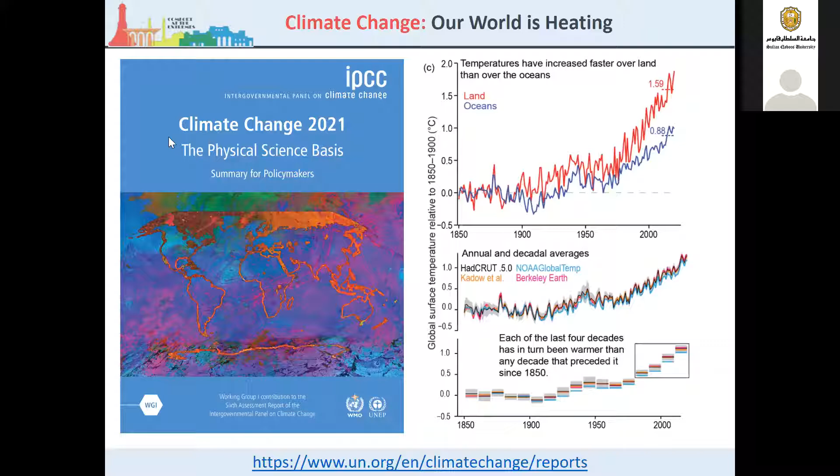The recent IPCC report shows that we have unequivocal heating of the world, and we all know this, and the evidence is overwhelming now. It's undeniable. But every ton of CO2 emissions adds to global warming. If you look now at where we are in terms of the temperature of the planet, we are getting on for about 1.5 degrees centigrade warmer than the 20th century average.

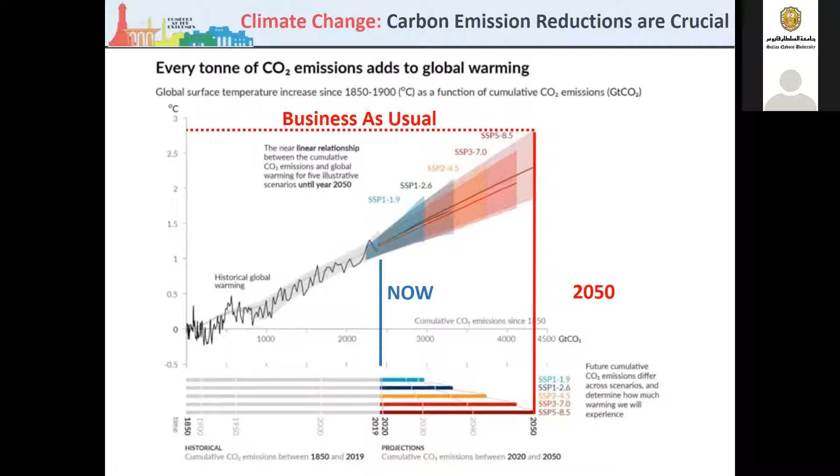But see how rapidly it's projected to rise in the future. By the time we get to 2050, a very short time away, it'll be up 2.5 to 3 degrees centigrade if we carry on with business as usual.

Communities, where you have non-functional communities, they become challenged. So we have to functionalize communities. We have to build resilient communities as well.

Infrastructure, we're getting systemic failures. We've seen this around the world, whether it's bridges washed out or grids collapsing. So we need to fortify infrastructures.

But the one that people often ignore is system capacity. Inequality in societies is magnified, meaning that as we have more people, they have less each. So we have to capacity plan and resource allocate, and that has to be systematized.

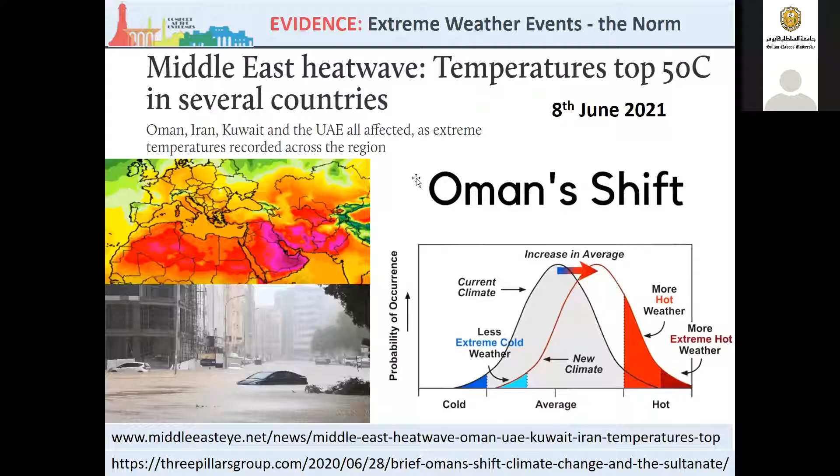As we heard in the opening, the Middle East is experiencing, like all other places of the world, these terrific extremes. In Oman last June, on the 8th of June, we had temperatures above 50 degrees centigrade, and it's predicted, there's a lot of good science predicting the types of temperature Oman will experience in the future. A couple of weeks ago, there was a terrific cyclone also mentioned, which had catastrophic effects on the infrastructure of the country.

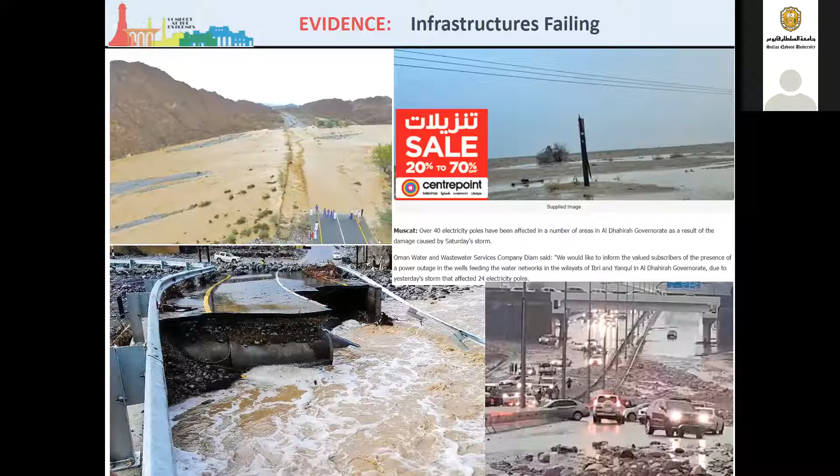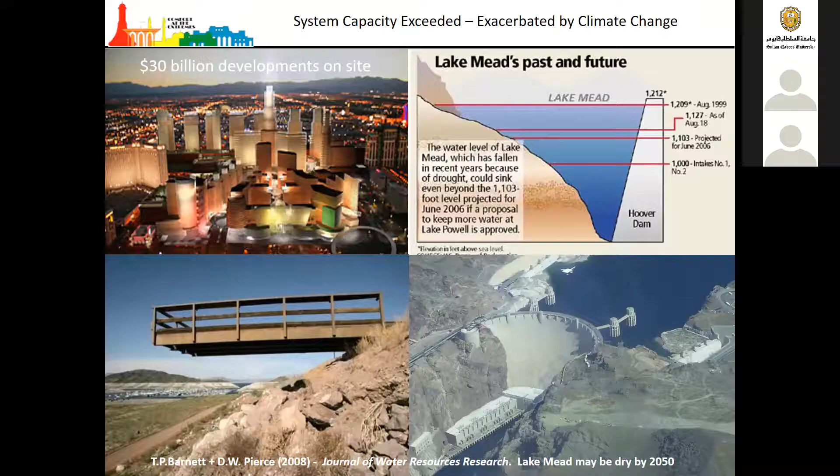And yet people are still watering the golf courses, and there must be something like 15 golf courses around Las Vegas. So at some point, the system capacity issue will kick in.

For climate change, we saw we need to build resilient buildings. We need to functionalize communities, fortify infrastructure, and systematize capacity planning.

But let's look at the other wild card here, which is the energy problem. Modern buildings simply use too much energy. Modern buildings do not often protect from extreme weather. Fossil fuel energy to heat and cool is becoming unaffordable. Power outages are commonplace, and modern fixed window buildings perform very badly in pandemics.

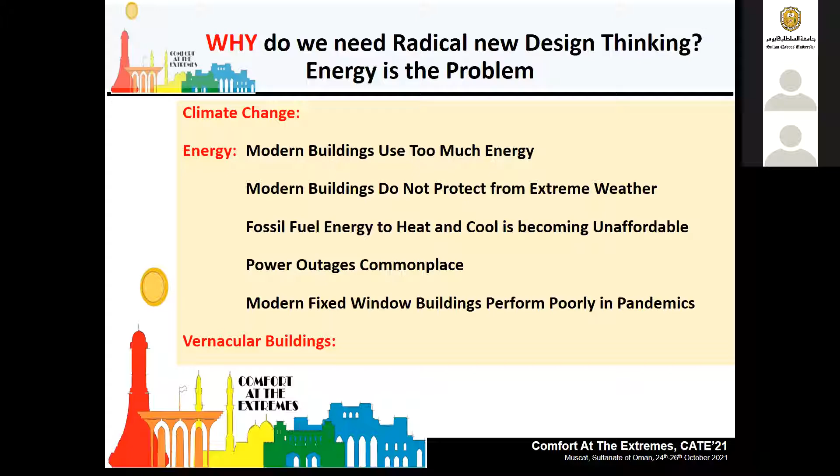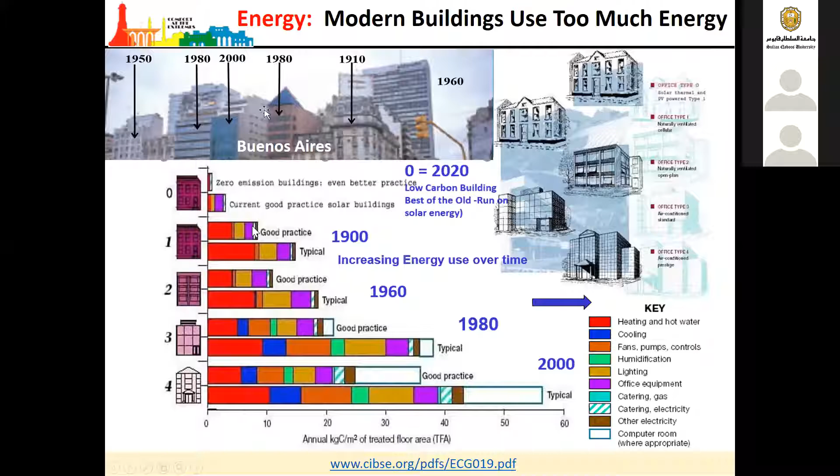Why are we getting increasingly energy guzzling buildings? Well, not least because the building regulations, the international guidelines and standards, and even the rating schemes are pushing ever more high prestige glass shut-off buildings.

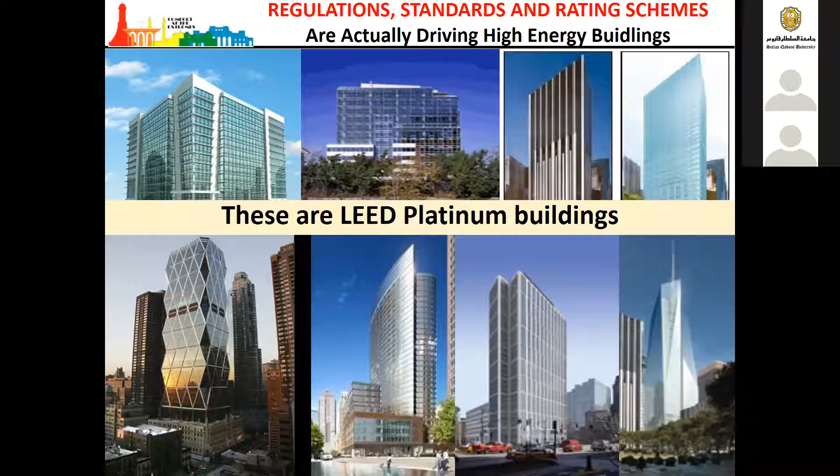Here's an example, the LEED rating scheme. These are LEED platinum buildings. I look on them almost as being climate crimes.

LEED was actually designed to promote high energy buildings. LEED, like any other green building rating scheme, is a simple point hunting approach. When it was first written, you could achieve LEED silver without actually improving the energy performance of the building. In the basket of points, energy efficiency may be achieved only by improving mechanical, electrical, and hot water systems, and by adding PV. That was how LEED was shaped. There was no need to improve the architectural design of the building to get LEED platinum.

The basic design of the building is essential for improving resilience. You couldn't actually get LEED platinum for a naturally ventilated building. Why would they do that?

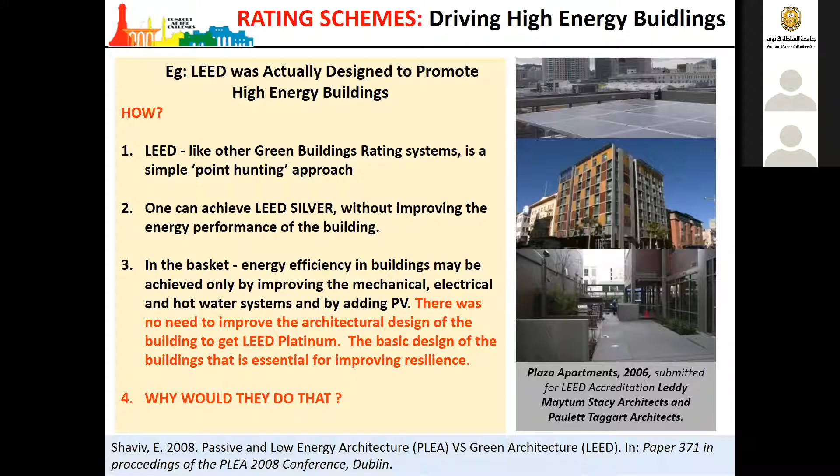These are extremely dangerous buildings. They are brittle, peaky, unresilient, high energy buildings. And look what happens when you have peaky buildings, you have a peaky city. So at extremes of air conditioning peak loads or heating peak loads, the energy supply systems simply push the systems beyond their capacity. So the lights go out. And they are not resilient buildings.

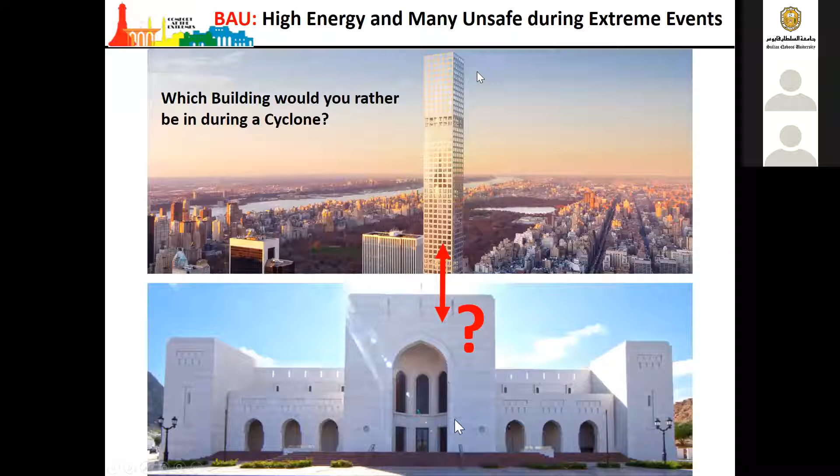Which building would you rather be in during a cyclone? A building that moves 7 or 8 feet in each direction at the top when the wind is high, or one in which you would be perfectly safe against every onslaught?

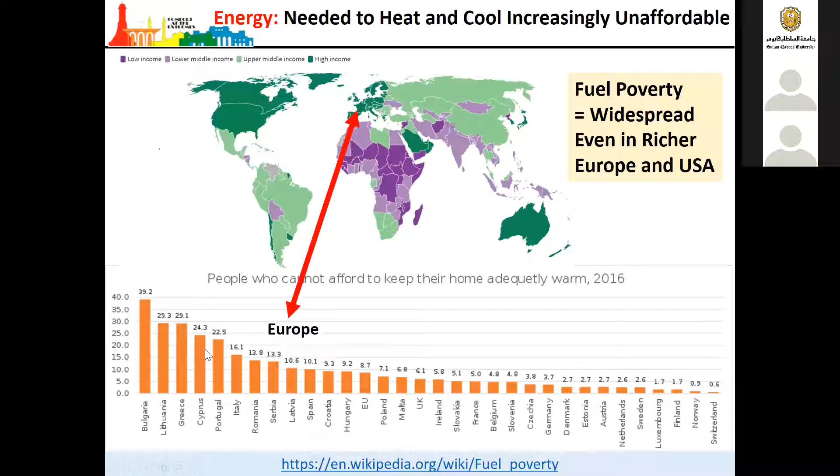We have a number of issues around the cost of energy too. There are politically dangerous energy price subsidies. For instance, while in Australia it costs 0.49 of a US cent for a kilowatt hour of electricity, it's 0.21 in the UK. That's historic, it's even more now. In some countries where there are energy price subsidies, to take those off is politically challenging.

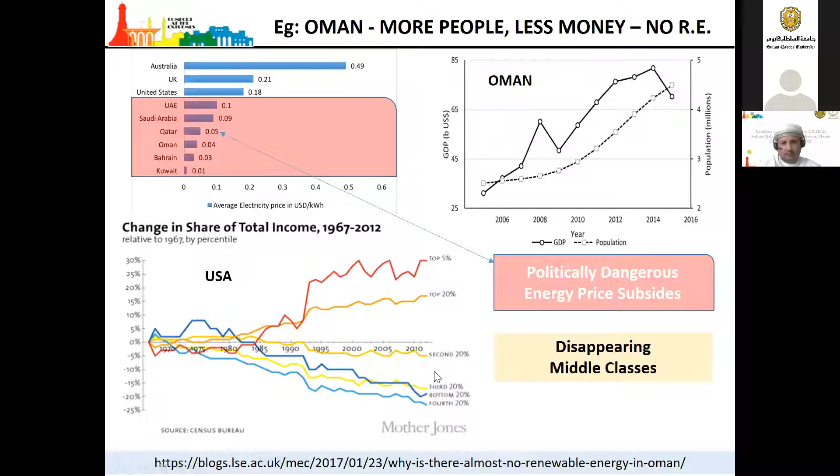In the decline of global capitalism, we see the disappearing middle classes. The top 20% over the last decades have done better and better. Yet the second 20%, the bulk of the middle classes, and the third and fourth 20%, their incomes are declining. So everything is going up, but the incomes are declining.

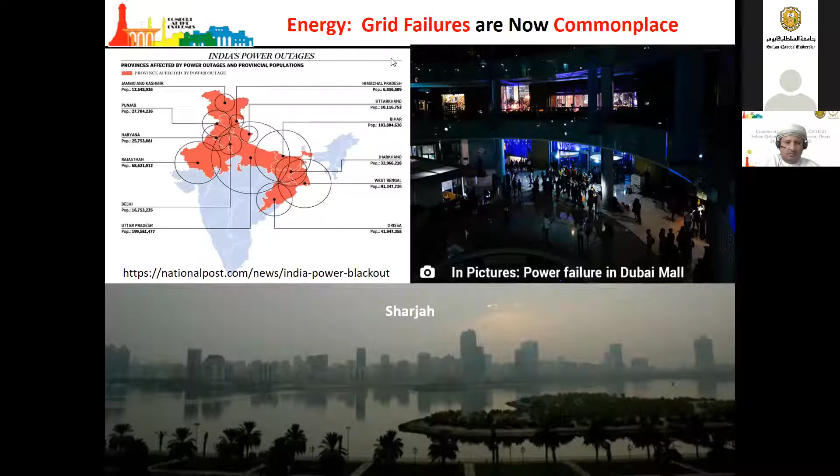Here we have also the capacity issue. Systemic power outages in Pakistan, India, across the Gulf even. Sharjah in particular has had real problems when the lights go out. And if it's 50 degrees centigrade outside your building and the lights go out, you have a problem.

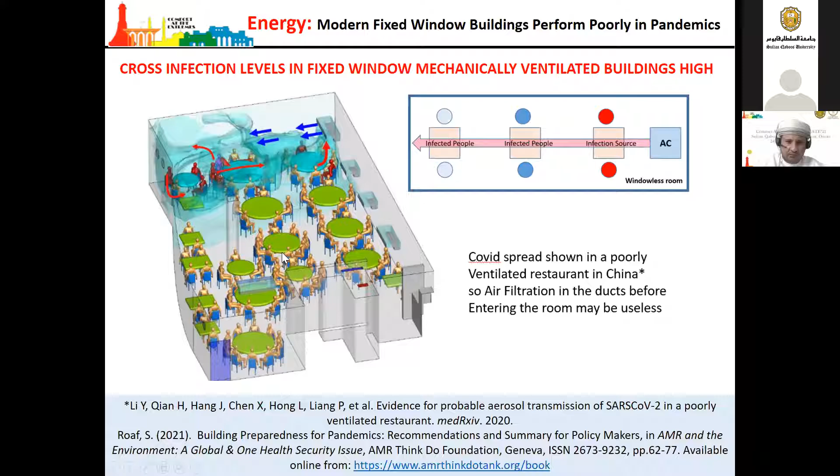So with climate change, we need to look at all of these issues that arose to begin with about building resilience. So what about the vernacular? What can the vernacular teach us?

Vernacular buildings teach us how to harvest free local energy simply through the building form, its materials and orientation. Vernacular buildings teach us how to store free energy in the material so we can load shift and load shave. We can use the coolth of the night to cool a building during the day.

Vernacular buildings teach us how to transport energy around buildings and cities, and they teach us how to simply survive to avoid collapse during climate extremes. And they've only evolved to do so because lifestyles, our behaviors, have co-evolved with local microclimates in those buildings. They also teach us how to power buildings naturally in different landscapes with local natural energy.

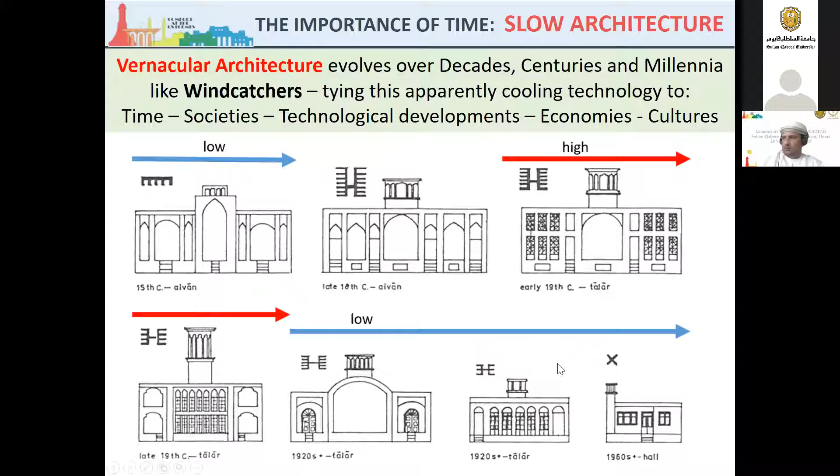Here, I'm going to use wind catchers as an example. These are the wind catchers of Yazd in the 15th century, in the Timurid period - small, low, and gradually with economic prosperity coming in the 19th century, not least with the wealth that flooded into the city from the opium trade to China, the wind towers became more and more elaborate. But with the introduction of electricity they became obsolete, as people use fans and air conditioners. So they have a very different role - they have an evolution over time.

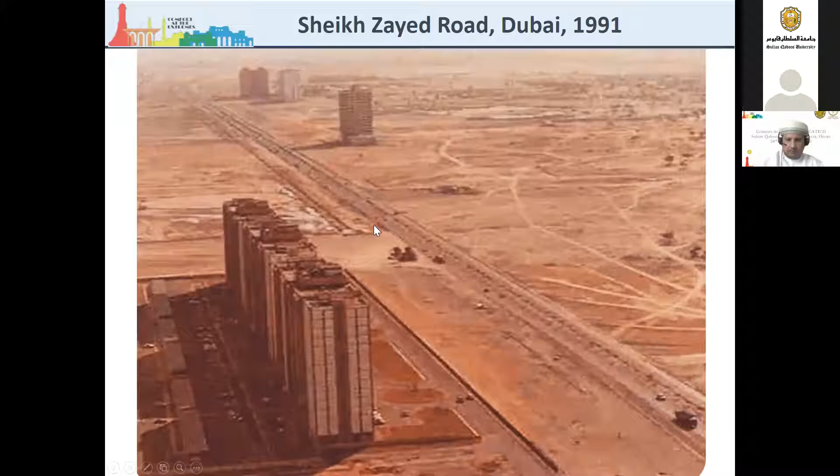Let's look at some fast architecture. This is the Hilton Hotel in the main street of Dubai. This is in 1991. This is it, 30 years later. This is fast architecture. Can you believe that? It's extraordinary.

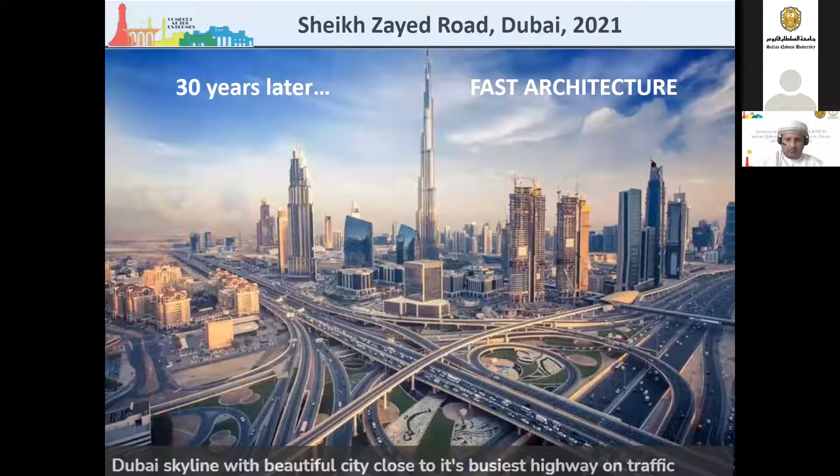With two very different trajectories from 30 years ago to now. We come from a long tradition of vernacular, regionally appropriate buildings in which lives went on without grid energy. In the 1950s, the wide-scale electrification of cities came with an expansion, a growing of building types, which upon that electricity and those models grew the great cities of today.

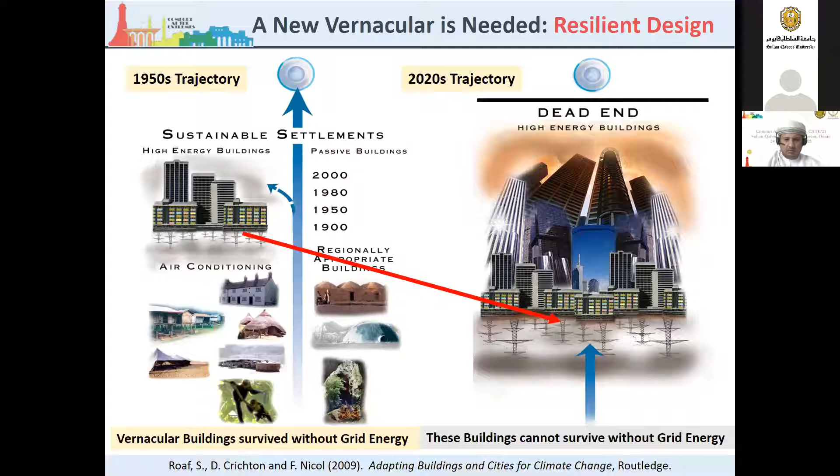This is the 2020s trajectory. But honestly, looking into your souls, do you see that that is the future of safe, resilient buildings and cities in a rapidly changing climate? Comfort at the extremes without grid energy. And here's a book we did earlier on running buildings on natural energy.

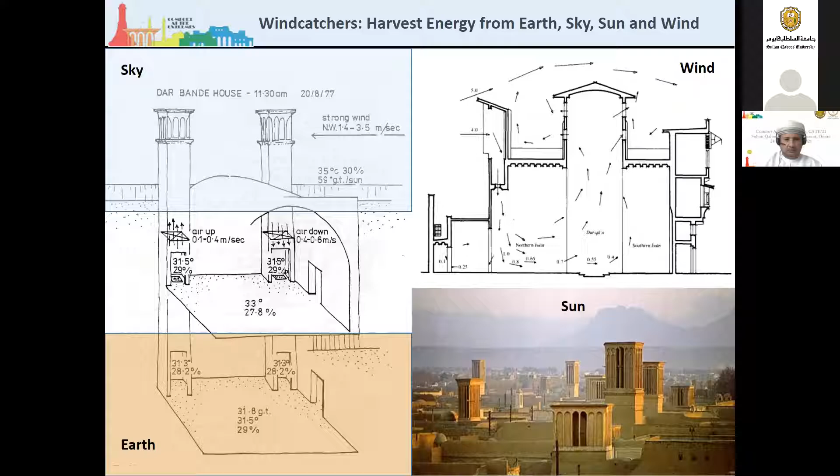I'd like to show you the case study of the extraordinary sophistication of wind catchers in Iran. These are the wind catchers of Yazd that cool people in the hottest deserts. How do they do it? They capture free energy. They capture the coolth of the sky, the wind from which direction they want. They take warmth and coolth from the earth and the sun.

They are uniquely adapted in all the different climates. So a simple wind catcher is very different in Bahrain or Baghdad, or even the modern ones in Yazd or down by the sea, or in Karachi, or in the high mountain buildings of Mashhad or Afghanistan. They are locally appropriate. They also use lots of different sorts of energy to upgrade what they have.

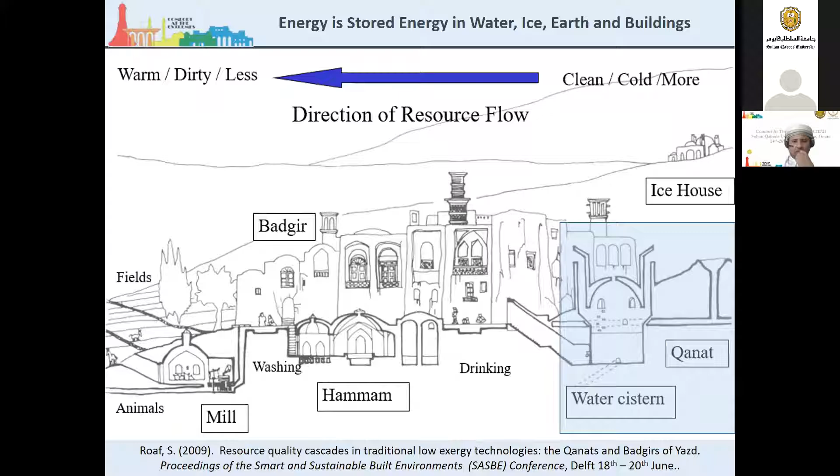I mean, they convert qanat water into ice. They use gravity to push water from the mountains into settlements in the hot desert plains for drinking and milling and washing and cooking. For instance, with the qanat water, it's carrying water from the mountains with this series of wells to the cities below. This is into Yazd, where you have to go down deep to actually access the water.

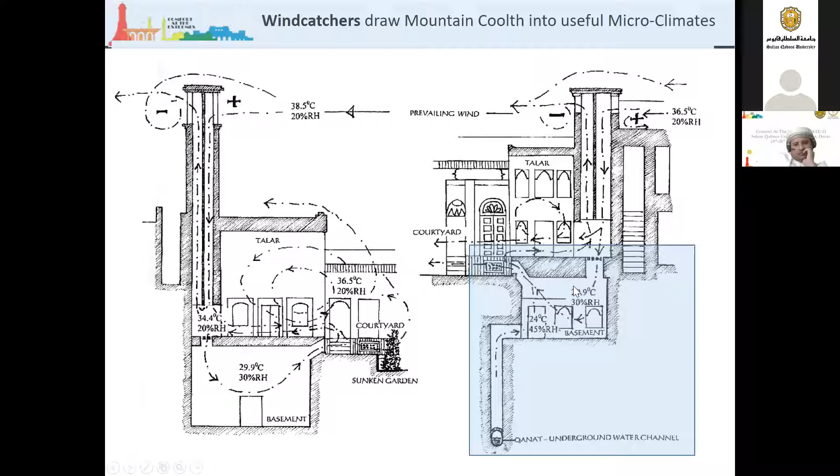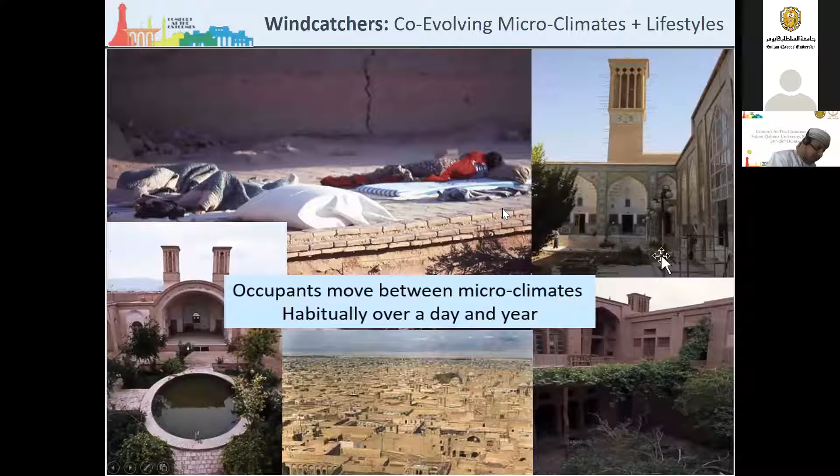But here in the basements of Yazd, those qanats are linked to the basement rooms. And it is the wind catchers, used as the wind air technology, that push air down into the basement rooms and draw it up from the basement rooms and transport that spread of coolth throughout the building. So these are extraordinarily sophisticated environments, and also occupants have to move between the microclimates over the day or the years. So they'll sleep under the beautiful stars at night and go down to the cool basements in the day.

So we know that vernacular architecture is hugely sophisticated and elegant, having evolved over millennia. But how can we learn from the vernacular? We have to actually study vernacular buildings because we've forgotten a lot of their lessons. I know that from having written a book about the ice houses of Britain and the Middle East, where people had completely forgotten about how ice was made in the deserts. We forget things really quickly, and the young generation know nothing of that vernacular wisdom, so they have to relearn it because it's important for our survival.

But it's not just the buildings, but the ecologies of the environments they're placed in, their context. A building is not a cardboard box. It is connected to the ecologies around it. Well, we have to take those lessons and adapt them to modern design challenges. We have to borrow design ideas from future climates, and we can do that by analogy. And we have to develop an experience-driven design process.

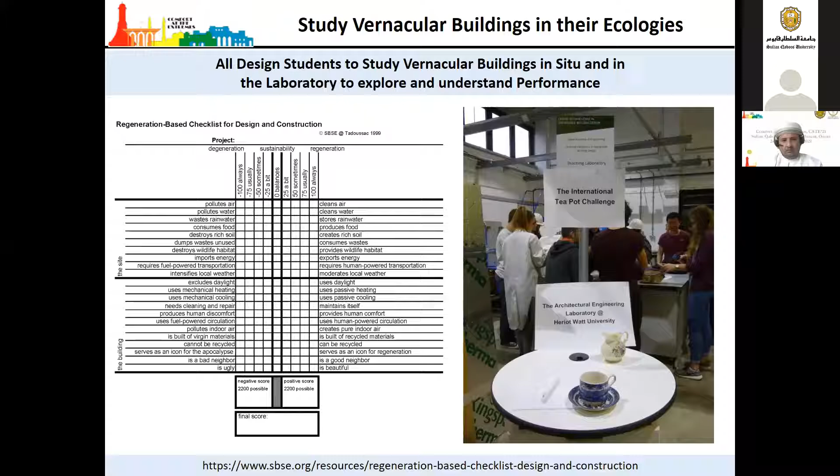Students all should study vernacular buildings in situ. They should go out and record the temperatures, how they're designed, and try and get to the understanding of those ostads or the master builders who built them. They can do that with innovative work in laboratories and do it largely in the field. And if you go to the sbse.org resources website, you can see a lot of different resources available for doing in situ case studies of vernacular buildings.

We have to then say, obviously, the vernacular was not fitted and adapted to future buildings and future conditions and current economic and social understandings.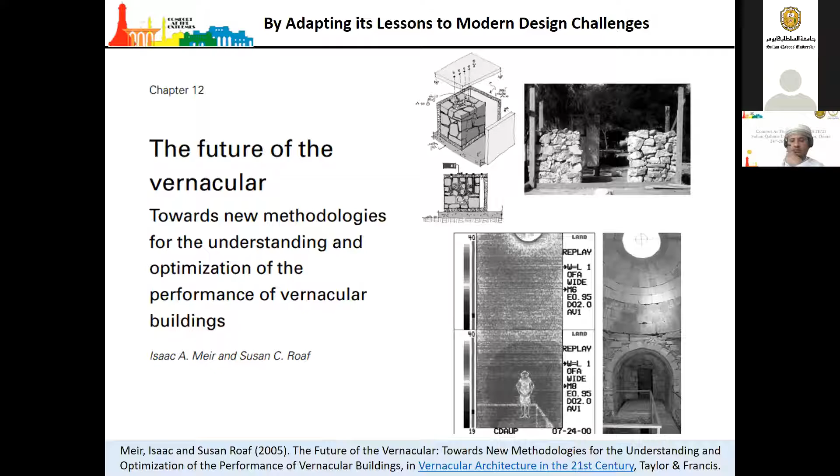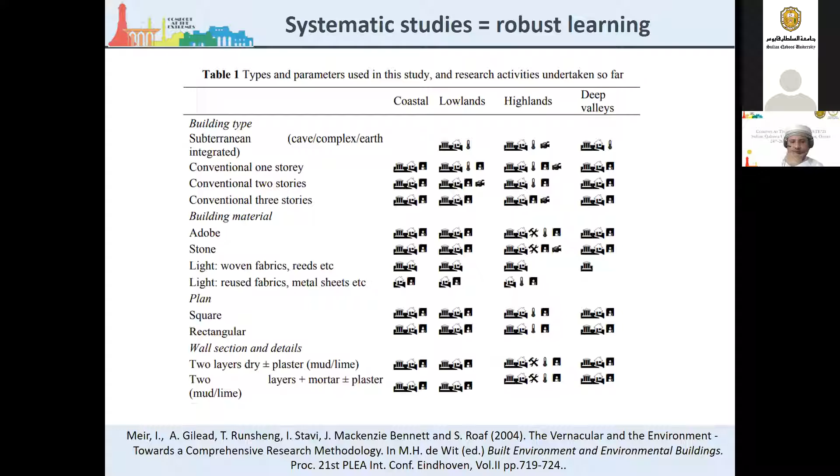Isaac Meir and myself did a chapter on the future of the vernacular, where we looked at how you take measurements and understanding in fieldwork and then use it to systematically develop understandings of the differences of parametric building types, for instance. So we need to systematically and intelligently apply those vernacular learnings to the way we design buildings today. And buildings today must be designed for climates of the future.

Here's some work done by Jake Hacker at Arups, where he said, look, architects are not very good at reading books, how do we instinctively understand what sort of design measures should we be taking? So what he did was take London in the 2080s, and he looked for a comparable climate, and he found Marseille in 1961 to 90, that climate would be very similar to London in the 2080s. So simply get yourself a comparable building.

How far forward? Do you want to be designing for the 2050s or the 2080s or the 2100s? Get a climate profile for a different place that is hotter and look at how they design buildings. That's one way of doing it. From his work and that of Michael Holmes at Arups, he came up with how do you beat the heat? How do we design for a hotter future? And he said, switch off, spread out, blow away, and cool.

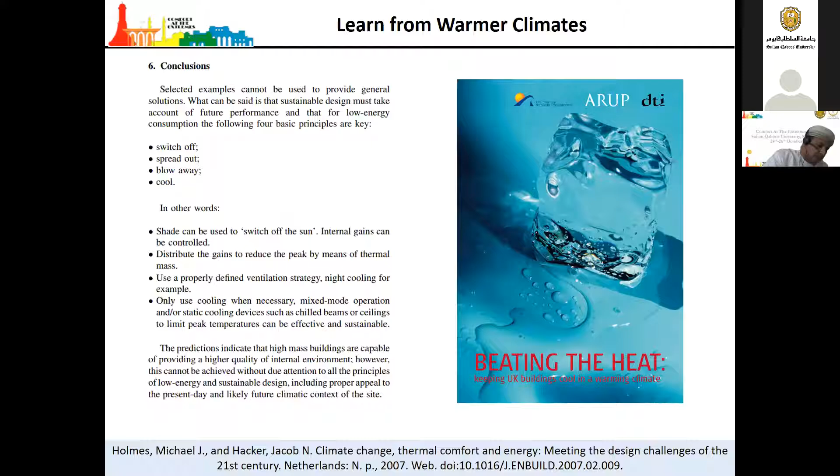And one thing I learned when I was working in Antarctica in 2019 and 2020, you can see that yurt, which is an extremely resilient structure we designed to survive in Antarctica. This is for remote climate sciences researchers at a glacier, Collins Glacier, for them to live safely, even if it's 100, 150 mile an hour wind in minus 20 and 30 degrees centigrade. This tent has proved absolutely astounding in the way it can withstand such extreme conditions.

But we found then that extreme design is a process. It's not a product. So you have to go to the exact site for a development and study its environs in great depth. What are the wind flow patterns around it? I'm talking about extreme designs here. You have to source and study appropriate vernacular archetypes for inspiration. And you can see here we used a Mongolian yurt as the basic, and then we used extreme materials and different features in a triple skin tent.

We simulated improvements to the traditional structure for that proposed site, but we only used simulation when it was useful. We explored innovative materials and structural solutions with experts. So we went to talk to people who knew how things worked, not what they said on their websites or, you know, the PR and the promos. We went to the source of knowledge, which are the experts in individual elements. You know, how do you build a guy rope and stuff?

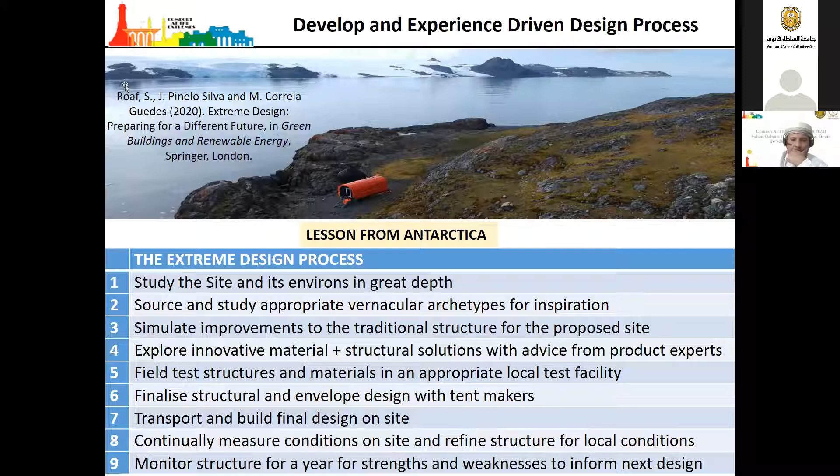You'll notice that simulation is only a small part in that process. It's the process of testing and prototyping and making it site specific that's important. Too much of modern design is done with crude simulation tools only. They are very limited. For instance, a lot of the programs deal with natural ventilation very poorly, thermal mass very poorly. They are only useful when they're useful. We should be training and educating a generation of profound thinkers, not CAD monkeys.

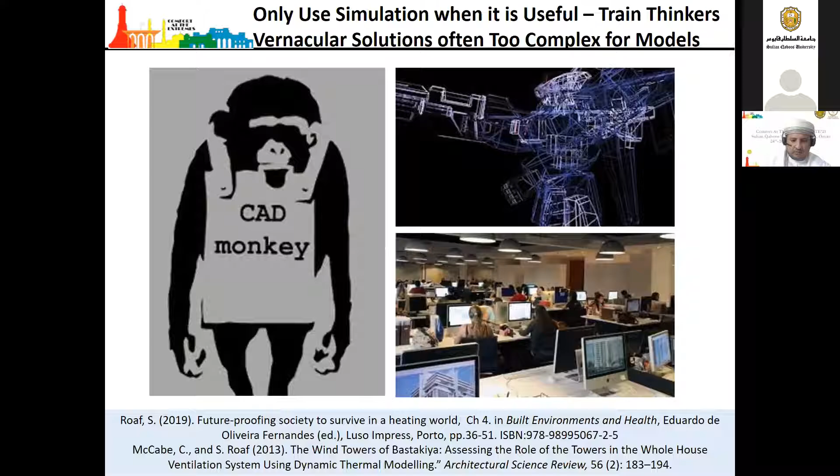How do we learn from the vernacular? We teach students to feel and understand buildings better. We connect students early on with people who actually build buildings, who know how materials work. We use that learning for myth-busting exercises. We teach original thinking because we're going to need to learn very fast in a rapidly changing world. We teach design as a process, not as a model product. And we ensure that people who teach design can actually design themselves.

Who must innovate to survive? It all depends on what your values are. And this is now, we're getting value-driven developments. Perhaps it's time to listen to Greta Thunberg when she says, "Come clean." No one is too small to make a difference.

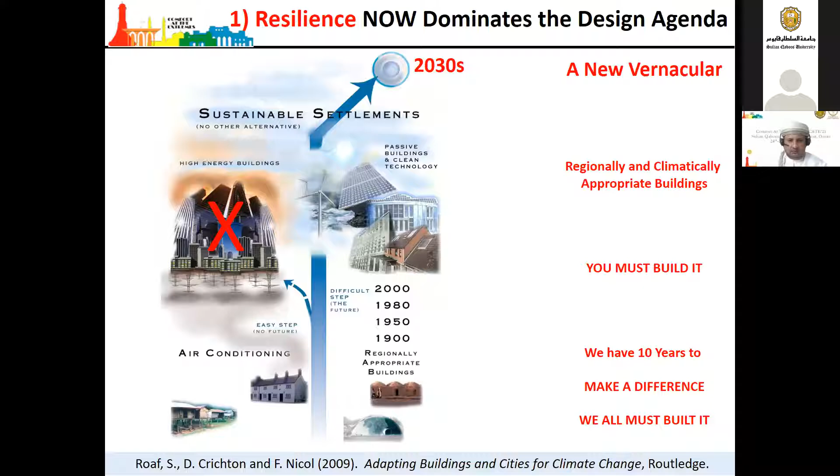We all have to change, and we all have to change rapidly, because that 20th century dream of developments is no longer fit for purpose in a world of extremes. We need a new vernacular, regionally and climatically appropriate buildings. And we have 10 years to make a difference, but we all must change in order to do that.

We must understand, again, going back to hazard, and we cover this all in our book, Adapting Buildings and Cities for Climate Change. Hazard, the risk triangle. How exposed are you? How bad is the hazard? How exposed are you to that hazard? How long can you survive? How vulnerable are you? How strong is your house? How strong is your office? What's your health? How good is your community? How wealthy are you? Can you buy your way out of it? As we saw senators doing in the Texan ice storm.

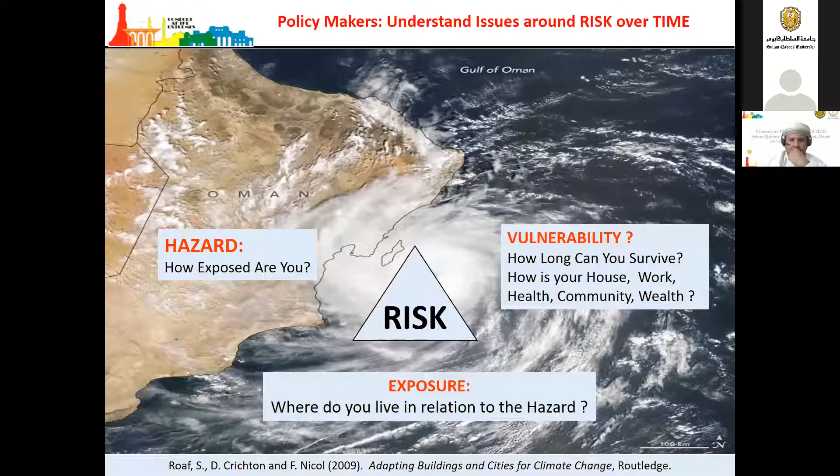We have to understand building risk. Nationally, here's some advice. Nationally, establish a multidisciplinary task force of independent experts to review all regulations. No one should be allowed to decide on developments that they can financially benefit from. We need to de-risk that process.

We need to reduce pollution in cities so that people can safely open their windows. We need to amend planning laws so that we get rid of deep plan buildings, so you can have buildings that can be naturally lit, naturally ventilated in a very unpredictable future. We need to windscape cities to prevent extreme impacts of cyclones. And there's a lot of work being done in Sri Lanka at the moment just on this.

And we need to create climate refuges. We have to wake up and understand that we already live in dangerous climates. So places where people can escape to be cool in extreme heat, to be warm in extreme cold, and to be dry in the extreme wet.

What about the future? In Oman, you're very lucky because you haven't gone what I see as a very dangerous route, the tall glass buildings road. Maybe buildings will only be 10 stories in future. That 10 stories is what a fully clothed fireman can reach safely in an extreme fire. So 10 stories, 4 stories, what can you carry a bucket of water up to? 6 stories, what can you comfortably climb up to? Who knows?

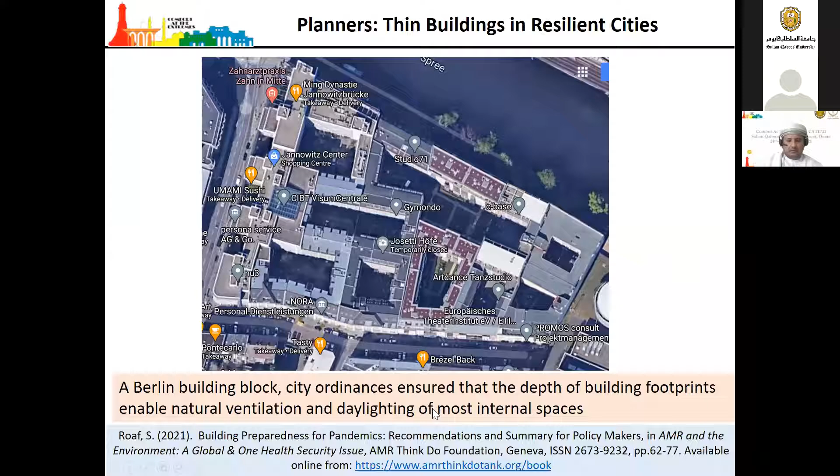This is Berlin. Berlin has a planning mandate that you can only design buildings which are so wide because they have to be able to be naturally ventilated and naturally lit. How sensible is that? And again, these recommendations are in a book, a chapter I've just recently done too. Buildings have to be naturally ventilated.

You have to now understand that the air conditioning industry driven narrow comfort zones of 20 to 26 degrees centigrade are completely inappropriate in a warming world, that we have to adopt adaptive thermal comfort standards that Fergus will be talking about tomorrow. We need to instigate classifications of building systems that promote naturally ventilated and mixed mode buildings, not promoting fully air conditioned ones like LEED and many other rating systems.

We need to instigate a modal shift away from air-driven HVAC systems. There's a huge move towards radiant heating and cooling systems, which is another business opportunity, not least because they reduce pathogen transmission between people and spaces, but they can also be low energy and more comfortable. We need to increase maybe floor to ceiling heights, not only in hospitals, but in offices and buildings.

You know, the urge to build ever cheaper buildings must be resisted, because we're building for the long term, and we don't want buildings to lose their value overnight because they fail badly. We must shade and open windows and provide security and insect screens so people feel comfortable opening windows, and we must make that provision at an early design stage.

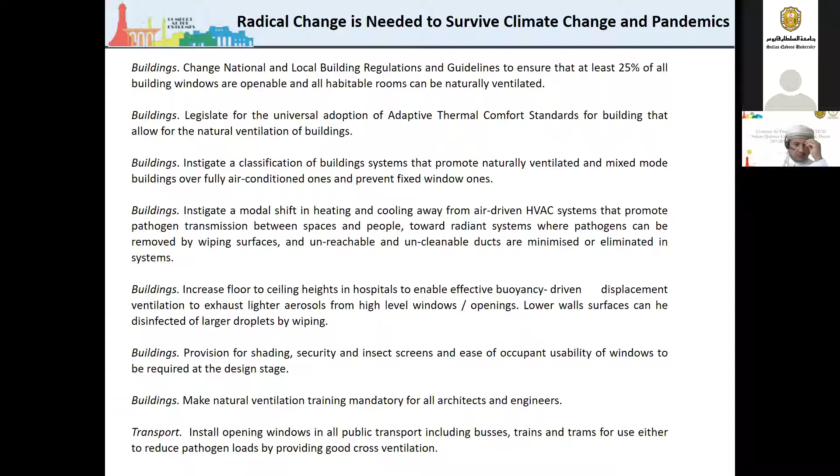Make natural ventilation training mandatory for all architects and engineers. You can go through a building engineering course or an architecture course and never be taught how to naturally ventilate a building. You're taught how to use a BIM model. That's it. Well, that's giving you the wrong answers. So rethink education. And we need transport. We need opening windows in all public transport, trains, buses, trams, simply for when those lights do go out.

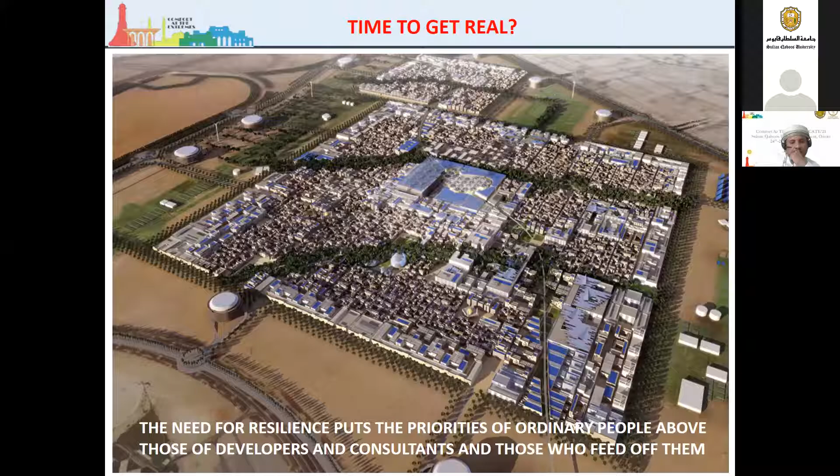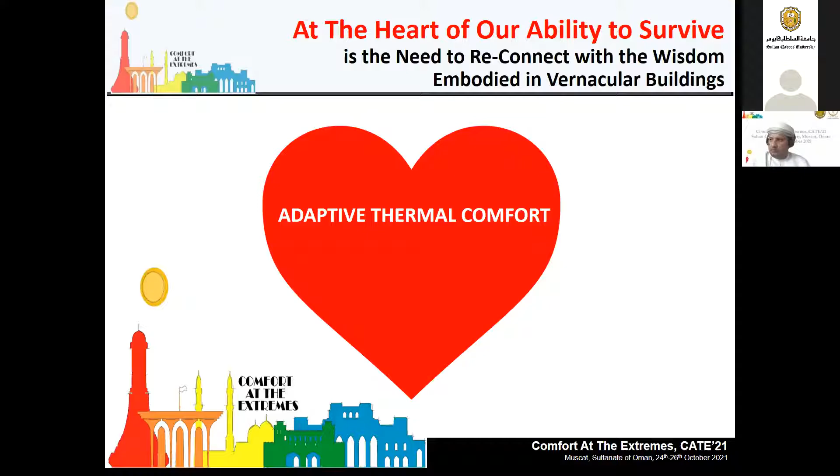Engineers must not be paid according to how much equipment they put in buildings, but be rewarded by how little energy those buildings use. Governments must ensure that those who write the building regulations or sit on planning and policy development committees do not stand to personally benefit, not because they are corrupt, but they are perceived to be corruptible. We need to decorrupt the system, and people must learn to value nature more and live with nature if they want to stay safe in a very different future. At the heart of it all is adaptive thermal comfort, needed to reconnect with the wisdom embodied in vernacular buildings.